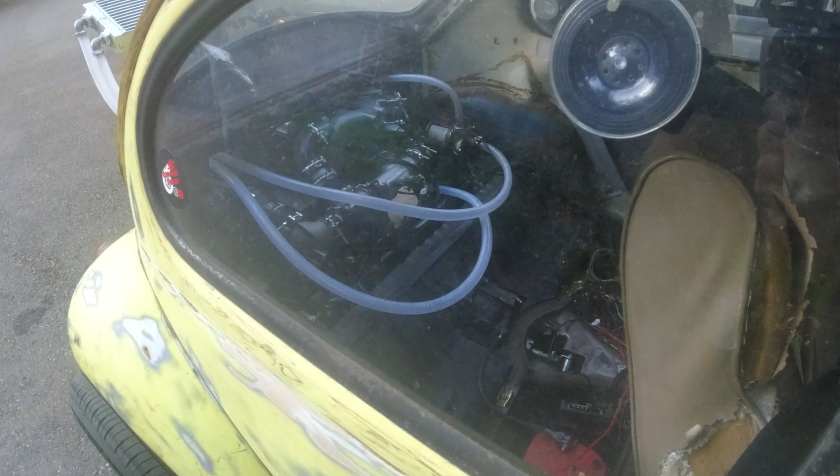All right, so here is the car. I still have lots to do to it. I gotta build a firewall. Here's my ghetto heat exchanger spoiler. Let's take a look at the motor. All right, look at that motor. And we got a nice little Gatorade bottle oil catch that barely has anything in it.

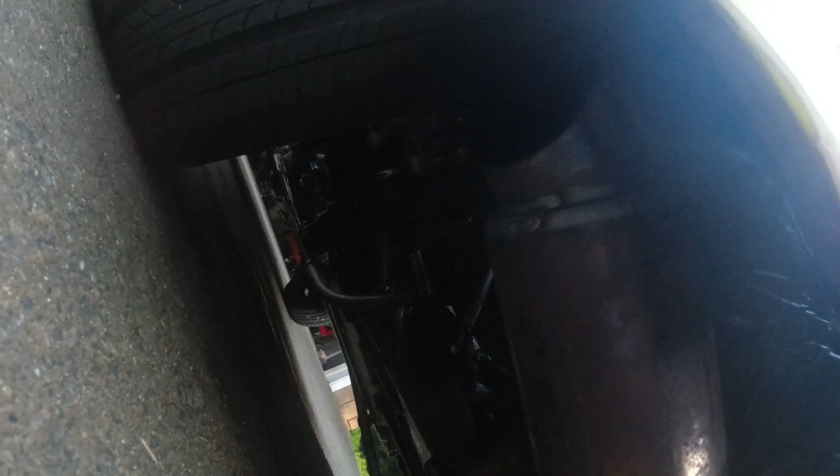And one thing that I don't like about this car, I don't know if you can see that, but that's a bullet muffler. And that thing is louder than crap. I'm looking to change that up to tone this thing down a little bit. So I literally have to wear earplugs when I'm driving this. Now, today, I got my mic set up on here so that way we can try to hear me talk. Last video I made, we couldn't hear me say a word because the exhaust was so loud. So let's see if this helps out a little bit.

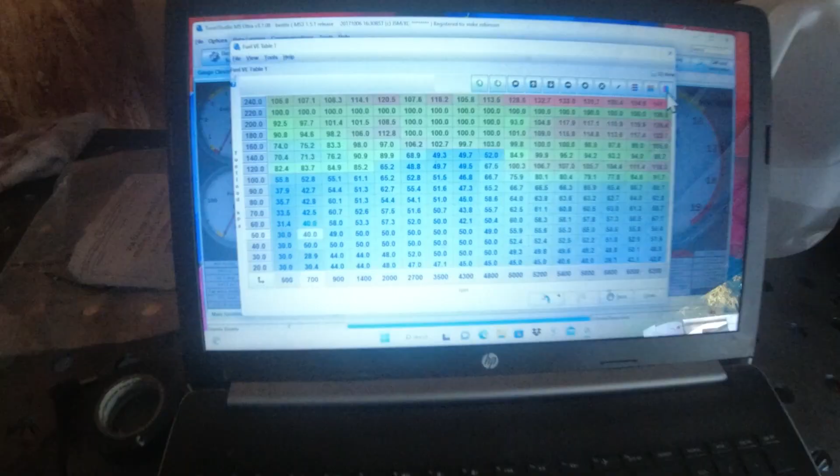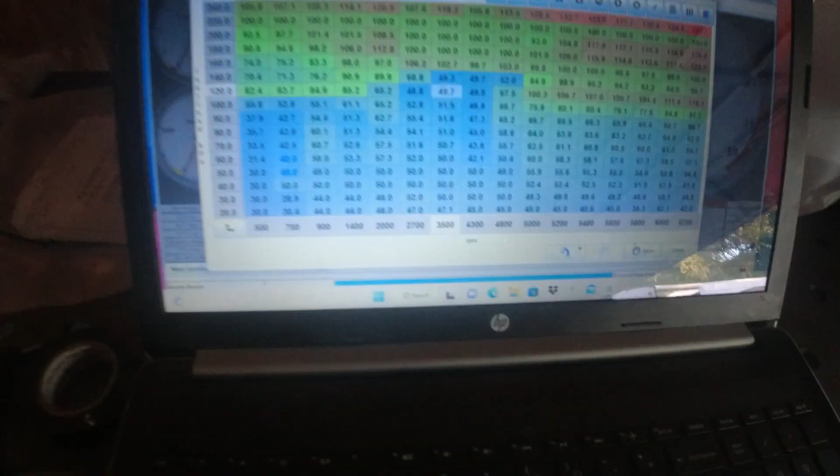So here's my current fueling map. Here's my cursor there. If you look right here in about 3,500 to 4,800 RPM, you see how it goes green right here? I have not tuned in that area. That's roughly 8.7 pounds of boost. We're only running 6. But that's a big change for how much fuel it's dumping out. 49.3 to 102.7. That's ridiculous. So I'm gonna sit here and go through a couple of these numbers and bring them down a little bit.

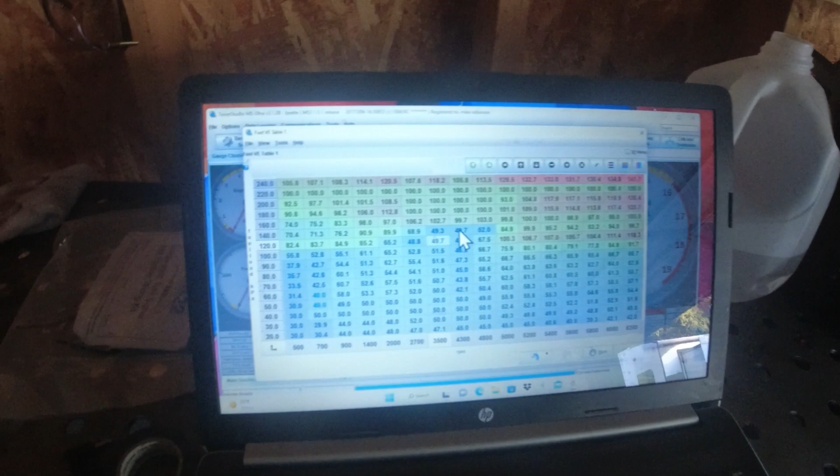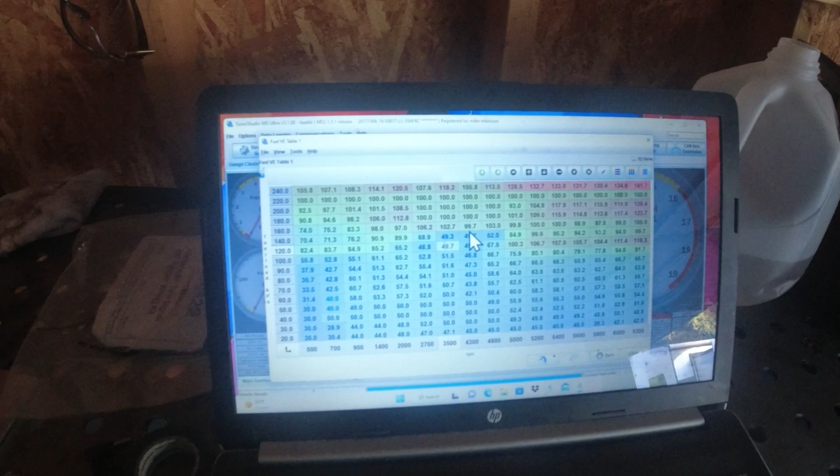Because when there's a cell right next to another cell, that cell actually feeds, like wherever the motor's running, the RPM versus the kPa, it'll actually blend. You'll get fueling from that cell. So if it's not dead center and it's coming up here like this, it'll actually throw fueling from that cell. So I'm gonna tone these down a little bit and try to smooth out this table.

All right, earplugs. Gotta put in my earplugs. So I am wearing earplugs because it is loud as shit in here. Let's see how well this does a cold start. Boop.

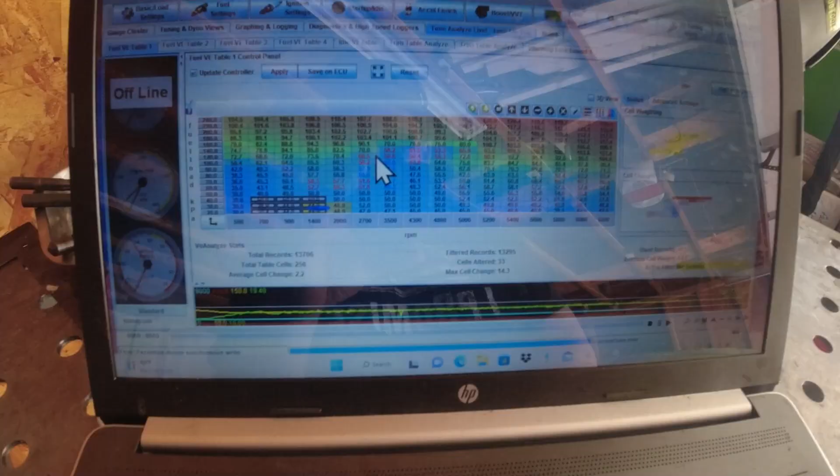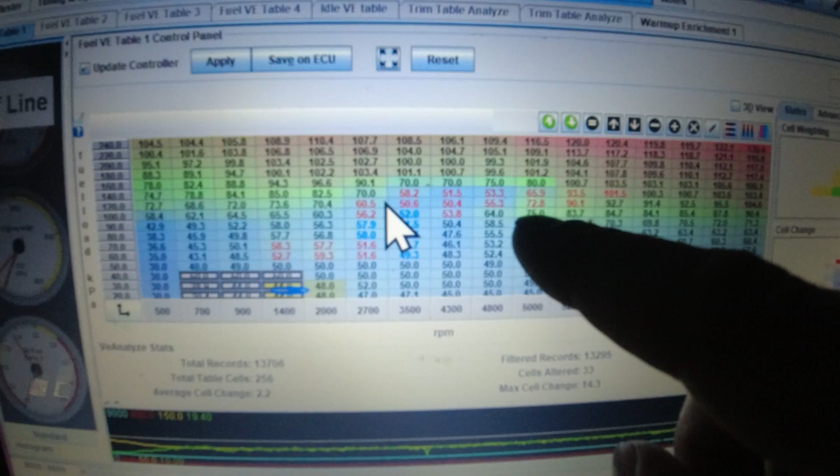So we're back in my garage and I just kind of wanted to show you my fueling map a little bit on what got adjusted. All right, so this is the auto tune function on MegaSquirt. Let me close my garage door. All right, there we go. We got a little bit better view on what's going on. Let's take a look here. So if you can see right about in the 4,300 up to about 5,400 RPM, up to 140 kPa, you see those red cells right there? That's the fuel that got pulled out while I was mashing on the pedal. The blue ones right here, that got added fuel.

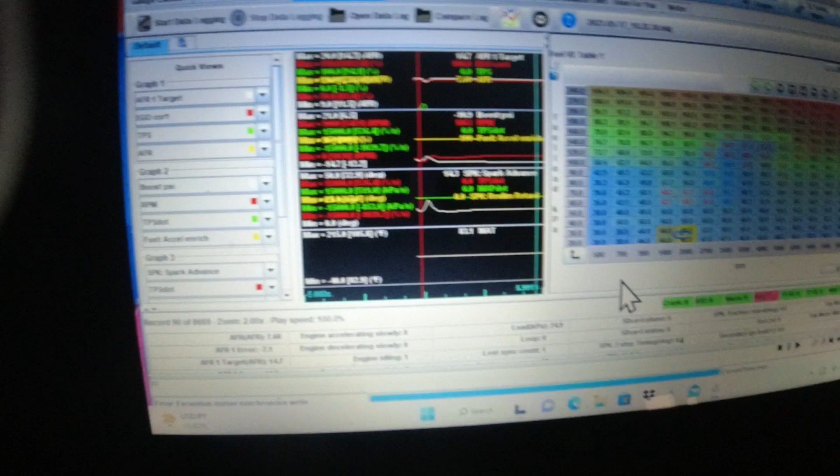So let's take a look at the data log. I think this is the one. Open. All right, I'm curious to see what kind of boost I was making in the 5,300 to 5,400 RPM range. So let's scroll all the way over there. I think I had another run somewhere. Nope, this is all the data logs. So you see that little cursor moving around? That's different varying driving. Scrolling. Okay, so here we go.

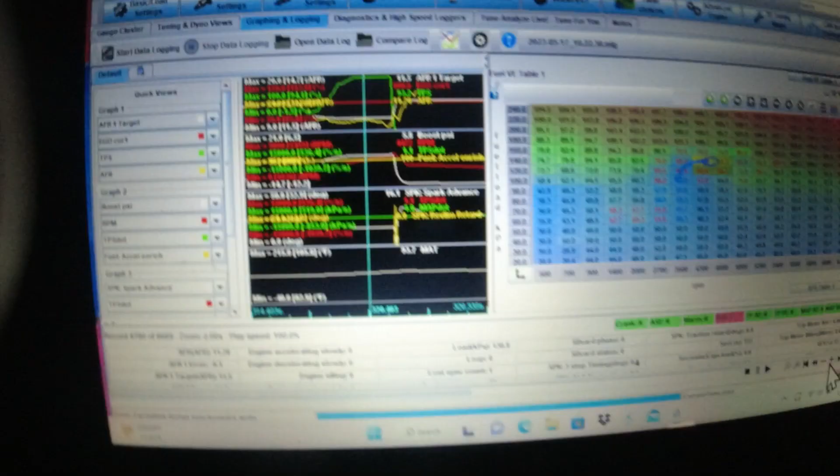All right, this is when I'm hammering on the throttle and boom, we got into 140 kPa right there. Can you see that cursor? Right in this area, I'm running an 11.2 air to fuel ratio. You can kind of see it's this yellow deal. So I'm at 5.8 pounds of boost at 4,400 RPM right there. All right, so right there we hit 6.3 pounds of boost. That's the highest amount of boost I've hit so far. That's cool. So that's right at 5,000 RPM.

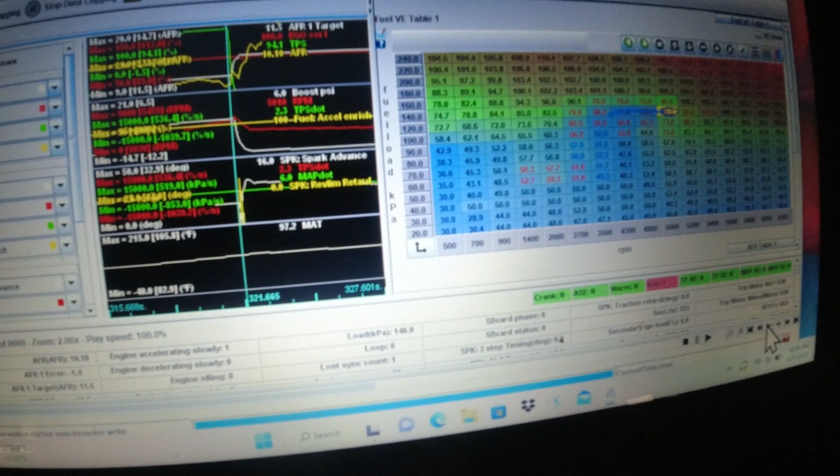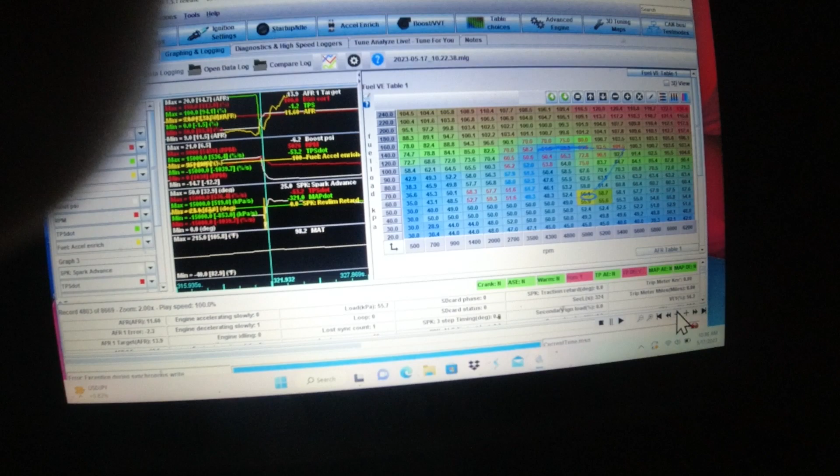So from what I'm researching with the valve springs that I've got, I can take this thing up to about 6,500 RPM. So we got a lot more tuning to go. So that's pretty cool. Now, I believe I am running way too rich. Right there is a 10.0 air to fuel ratio. And I think a little bit of that has to do with the fact that just above these cells is kind of blending with this.

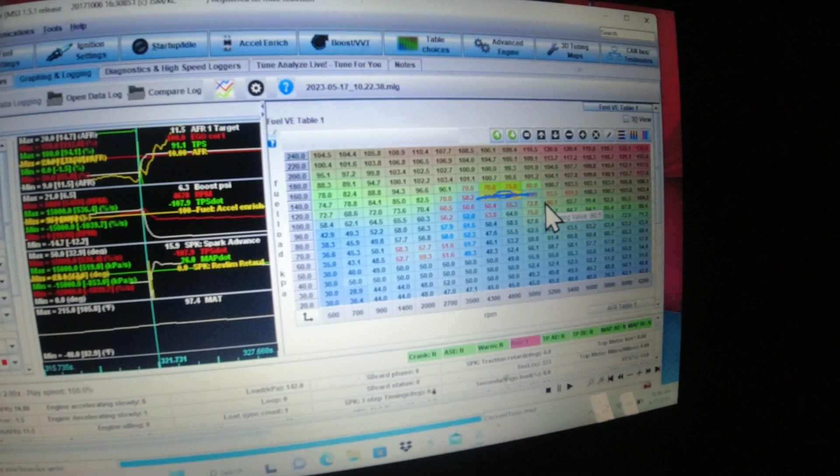So I might pull these down manually a little bit and then kind of see where my fueling's going. It goes from like 55 to 72 to 90. I mean, that's a huge jump in fueling. So I might smooth this area out a little bit and then go do another little log here.